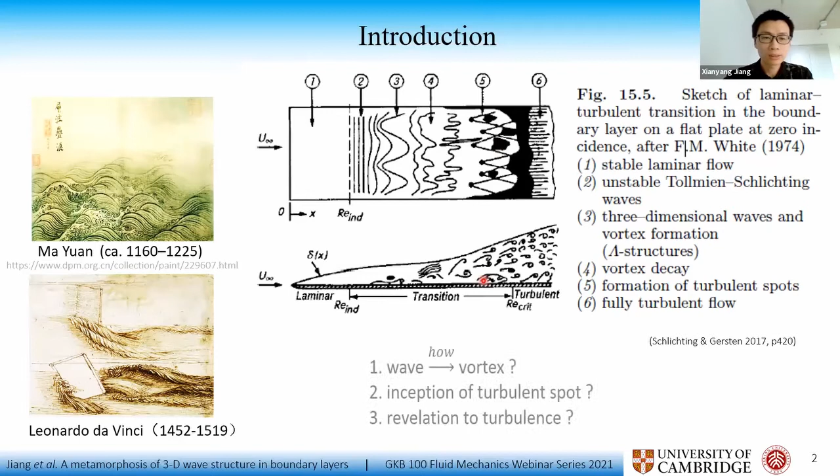The topic today is mainly about transition from a laminar boundary layer to a turbulent boundary layer. Usually in classical transition, it is initiated by environmental disturbance from a 2D TS wave, and it is three-dimensionalized and appears with vortices. In the final stage, there will be some turbulent spots and eventually fully developed turbulence. These stages may not all be in a specific transition path. In some cases there will be only TS waves, and in some cases no turbulent spots appear.

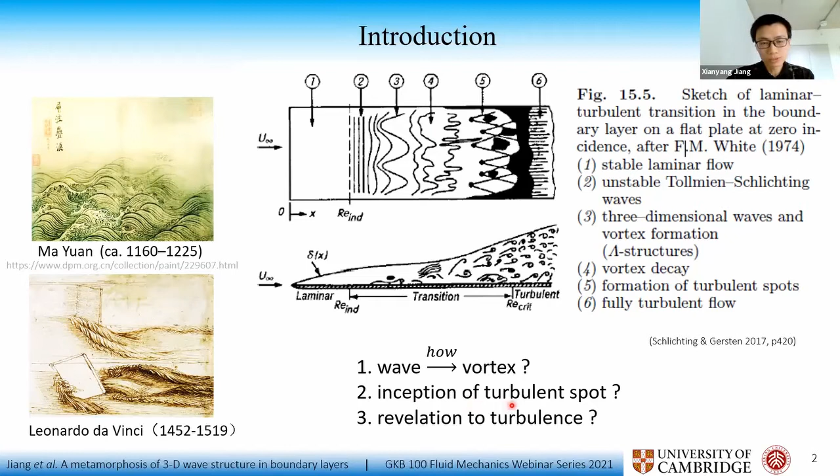So the first question here is how three-dimensional waves develop into vortical structures. The second one is what is the inception of turbulent spots? And how are these two questions related to turbulence? So today my topic is mainly about transition, turbulent spots and the turbulent case, to draw their similarities.

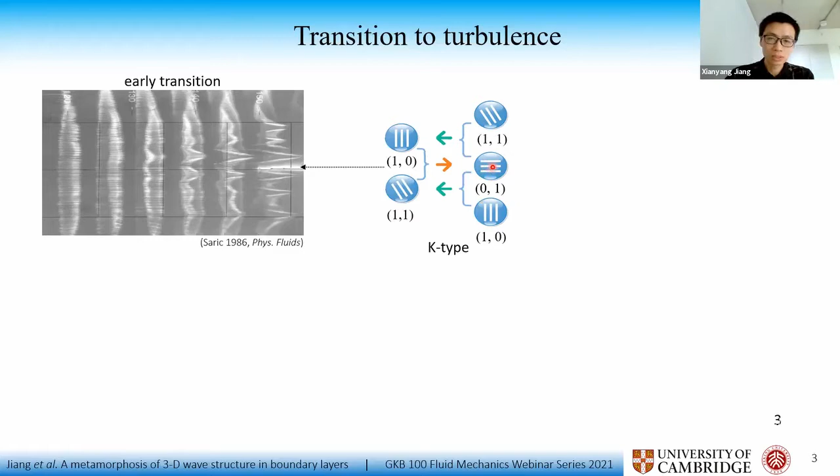Classical K-type transition begins with TS waves and aligned hairpin-like structures. There is some interaction between two-dimensional waves, three-dimensional waves, oblique waves, and streamwise vortices or streaky structures. It was observed that the lambda structures seen in hydrogen bubble visualization develop from a kink structure. This is also termed a soliton-like coherent structure. It's a 3D nonlinear wave packet that can travel a long distance with little loss of energy.

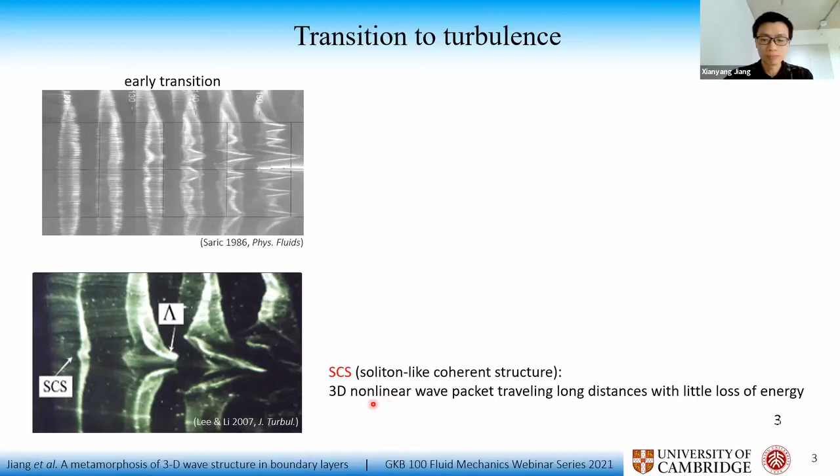When we observe the side view of these timelines, we see the kink develop from the wall, and it becomes a warped wave front. This is a three-dimensional wave front, and finally a discrete vortex. The warped wave front means that the TS wave warps its front, finally becoming a swept-back front, like this bubble accumulation pattern.

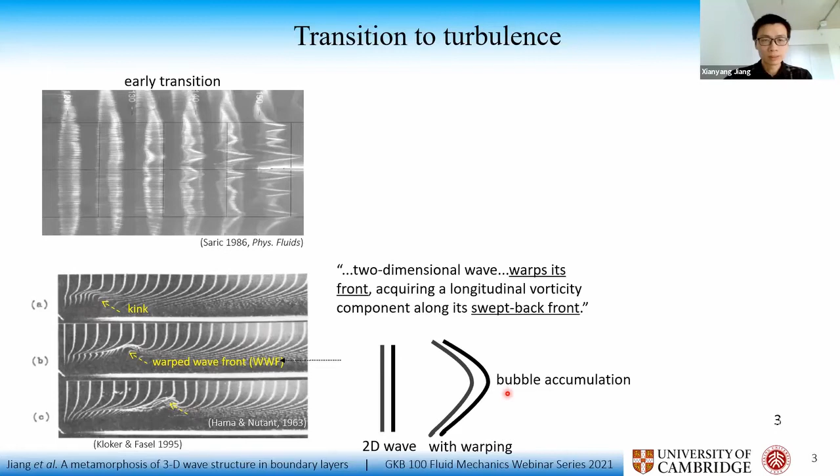The turbulent spot case usually appears with high free stream disturbance. Here is the temperature field in which turbulent spots develop. When we look at the origin of these turbulent spots, they seem to originate from a triangular shaped structure and the hairpin-like structure. So what's the relationship between these triangular shaped structures and the final turbulent spot?

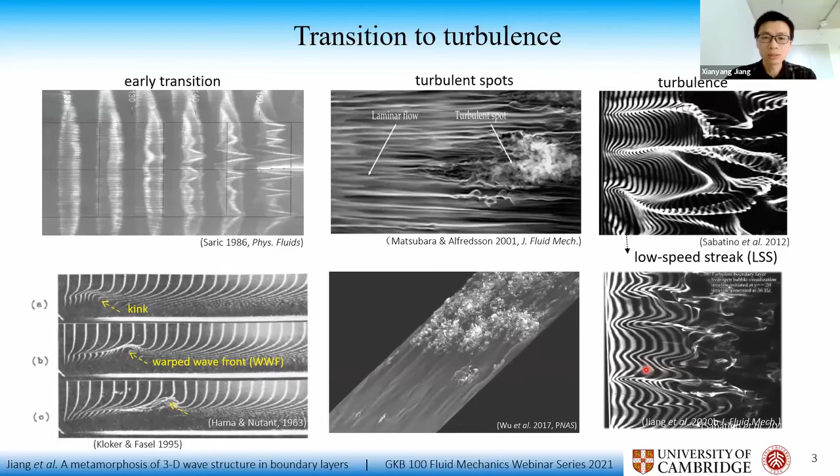In the final turbulence case, in the visualization we see a typical low-speed streak. It's meandering and also oscillating during the development. This low-speed streak is also observed in some transitional cases. So what's the relationship? To answer these questions, we need to visualize the structures.

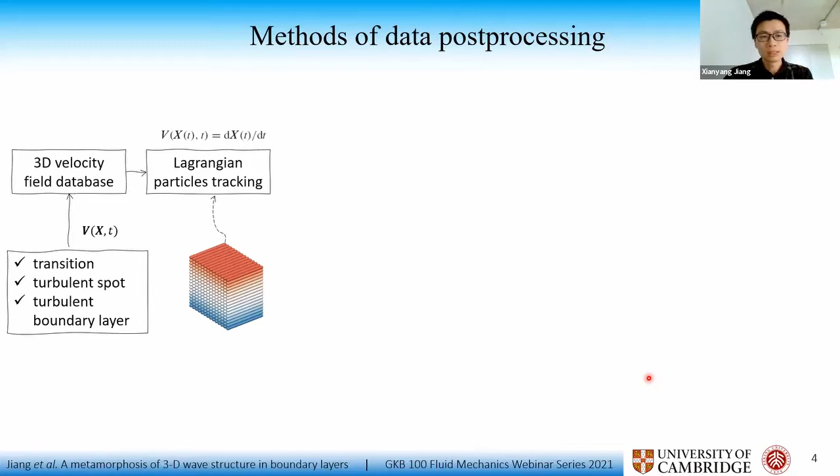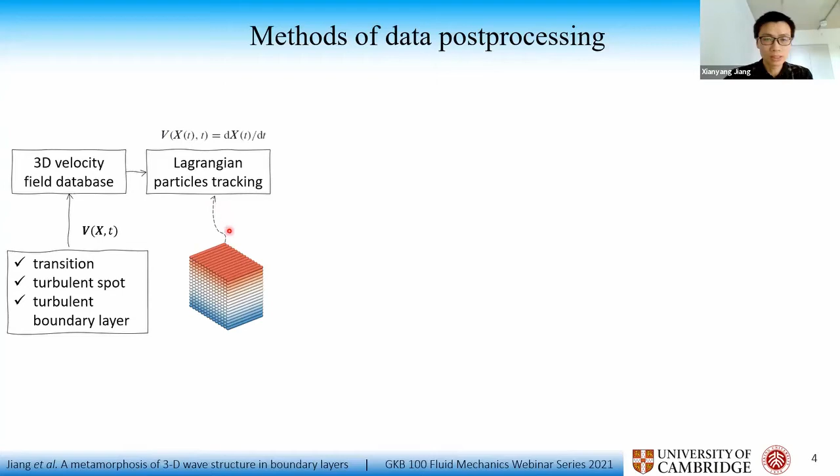In this talk, I mainly use the Lagrangian tracking method. We use data sets from transition cases, experimental or numerical simulation. We track each particle to visualize the development, like traditional streaklines or timelines, and also surface evolution. Then, based on the trajectory of each particle, we extract the Lagrangian-averaged enstrophy. This is an integral of enstrophy over a period of time to see the vorticity concentration or stretching, the shear layer.

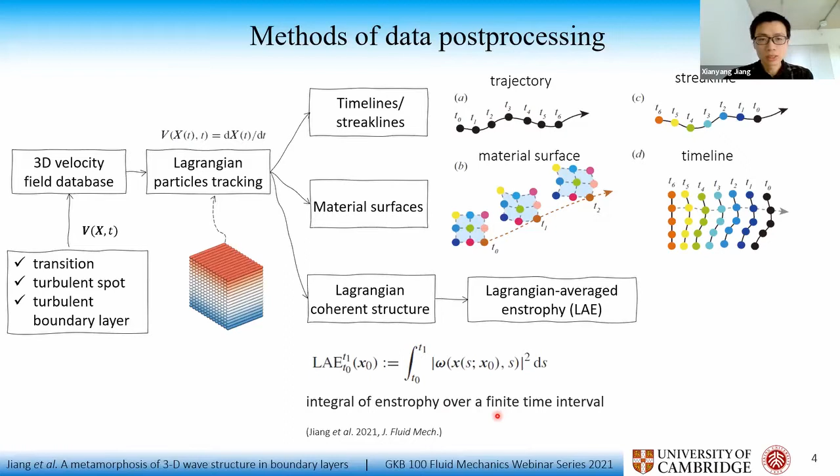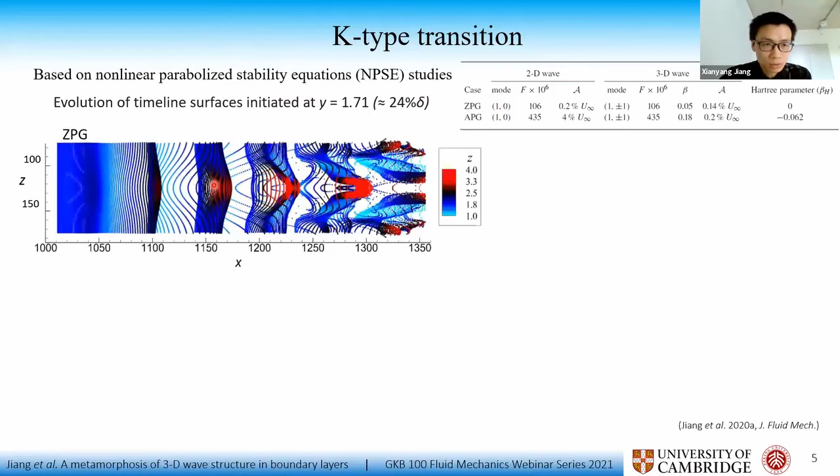For K-type transition, here we show nonlinear parabolized stability equation studies. We introduce a 2D wave and a 3D wave at the beginning to see the difference between K-type transition in zero pressure gradient and adverse pressure gradient. This is for zero pressure gradient. We see the TS wave three-dimensionalize and develop hairpin-like structures. The lambda structures seem to develop directly from the warped wavefront we mentioned before, and the high shear layer is located here in the front region.

But for adverse pressure gradient, it seems a bit different. The hairpin or lambda structures seem to develop from a tilted transverse vortex tube, and finally look like omega-shaped structures. But the whole process, I mean the pattern of this development, is similar. Both cases are similar to our experimental observation of the warped wavefront and lambda-shaped structures. And the low speed region we see here also appears in the middle of these lambda structures.

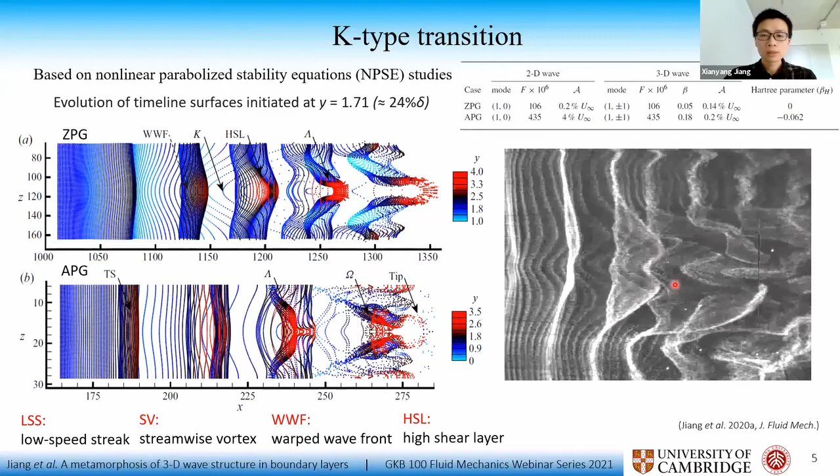Okay, to better visualize the wave development, we also examine the surface evolution at different wall-normal positions for the two cases. And this is the evolution of the surface in the near-wall region for zero pressure gradient. We can also see the hairpin or lambda-shaped structures develop from the three-dimensionalized wavefront.

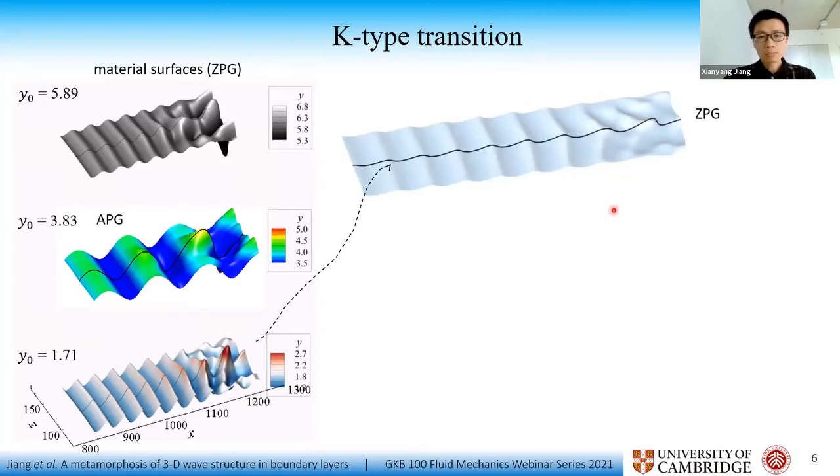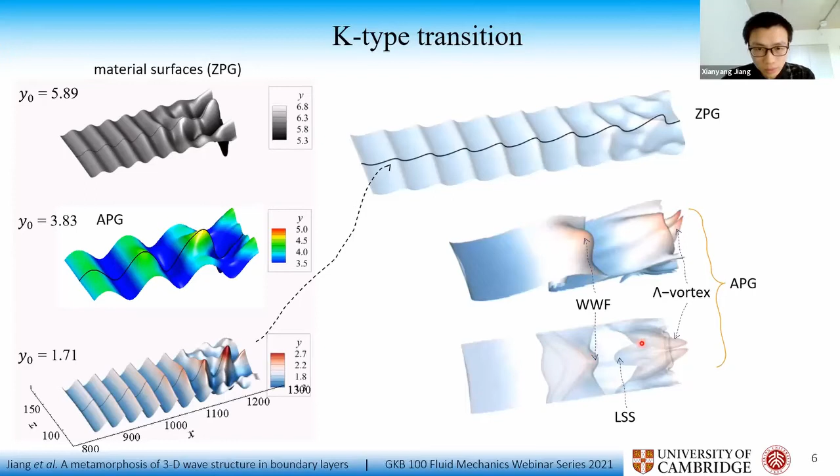But for adverse pressure gradient, we see here the surface deformation, and the lower one is the transparent surface in a different angle to visualize the structure inside this wavefront. And you see that the lambda structures develop upward to protrude the surface. So it means here the structures seem to be closer to the wall.

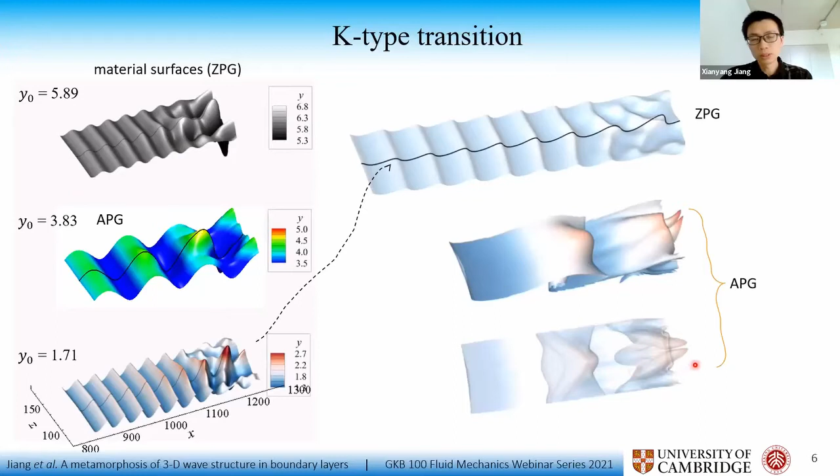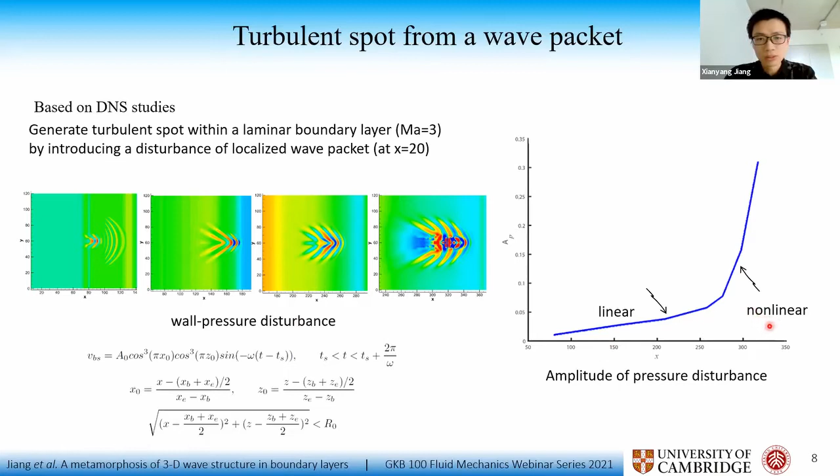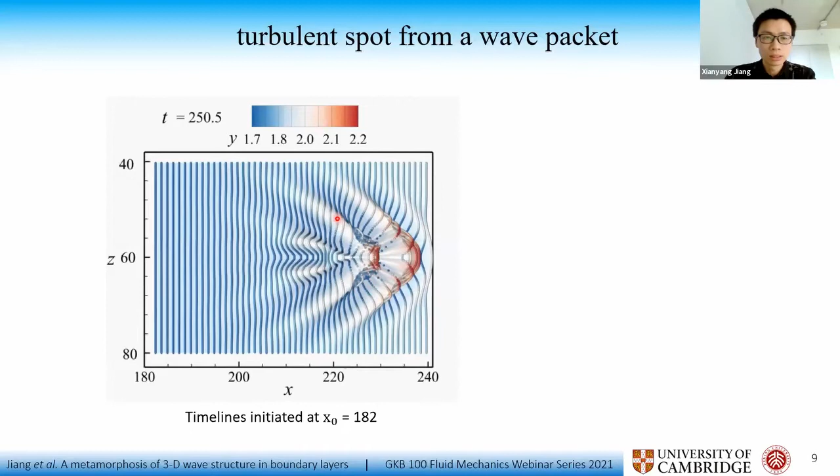And the pressure will undergo two stages. One is the linear stage, and then the nonlinear stage. In the linear stage, we see here there are two wave trains, and they develop downstream with the roll-up occurring here at the wavefront, and two weak low-speed regions appear here.

But for the nonlinear case, this low-speed streak is more narrow and similar to the turbulent case. And in the front of this packet, we see rotational structures here, lambda structures. It means that the low-speed streak may not be the result of vortical structures; it can also be the result of wave packets. And this packet will finally break down into a turbulent spot.

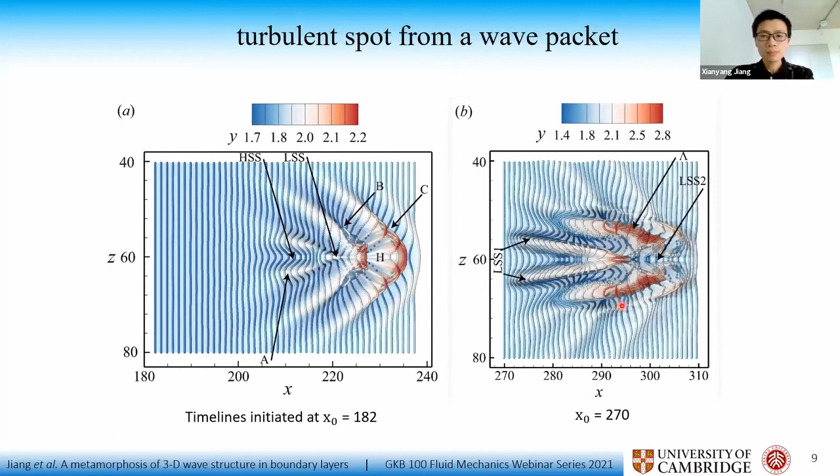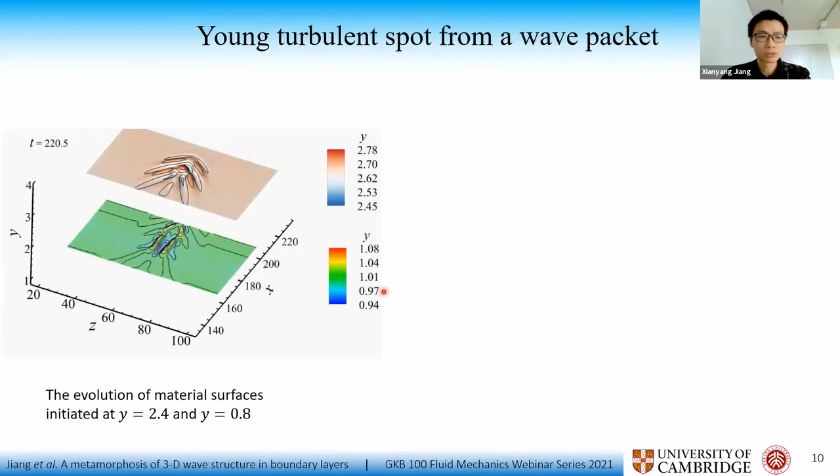The evolution of the material surface near the turbulent spot at different wall-normal distances is shown here. In the higher position, we can see the wavefront and also a very clear three-dimensional wave in the middle. And in the near-wall region, we see two low-speed streaks here, and they consist of several three-dimensional waves.

And the LAE distribution also shows that the strongest concentration of vorticity is in the front region. This means that higher shear appears here. And the contour of this cross section shows that the wavefront has the highest vorticity concentration, and in another region we can see a weak hump-like structure just at the position of this low-speed region. So it seems that the turbulent spot is also a result of wave packets.

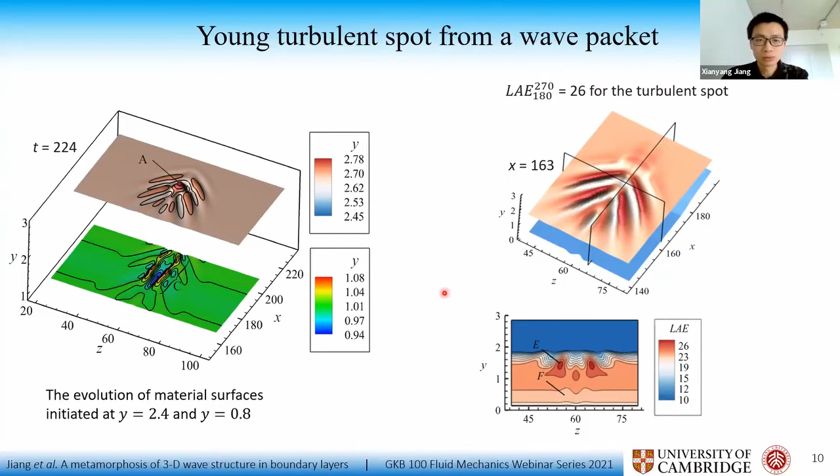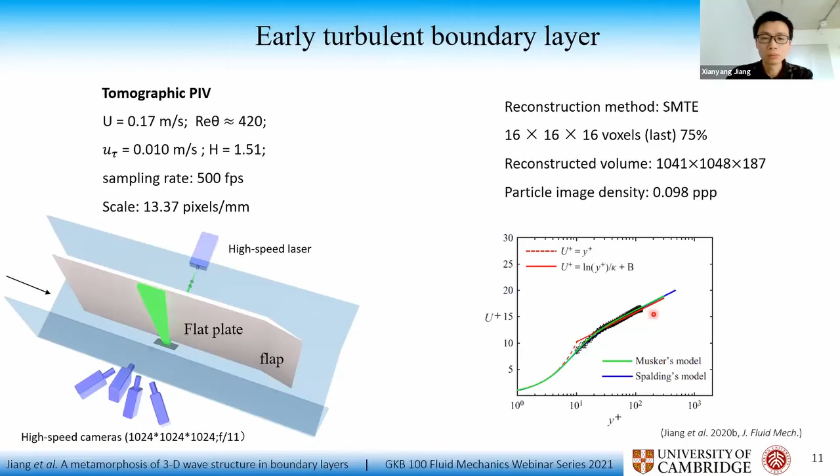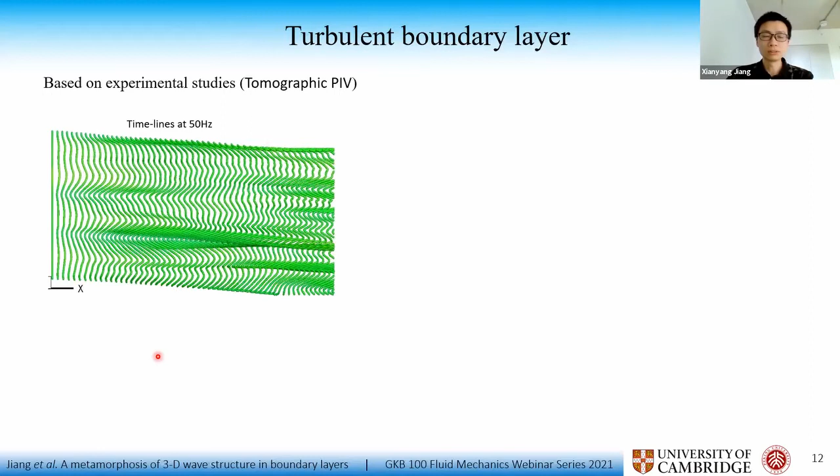So let's see the turbulent boundary layer. This data set is obtained by tomographic PIV, and we focus on the near-wall region where Y plus is below 100. We reconstructed the low-speed streak development here, similar to hydrogen bubble visualization, and identified the low-speed streaks and their development. Here, the low-speed streaks are similar to hydrogen bubble visualization, with spanwise spacing of about Z plus 100.

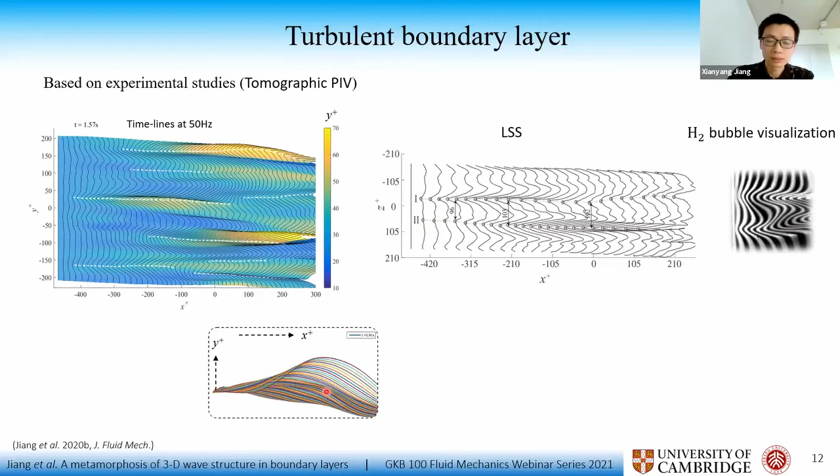And if we place a particle in the region of the low-speed streak, this particle will develop a streak line, just like an oscillating wave development. And the three-dimensional timelines also show the amplification and the damping of the wave structures.

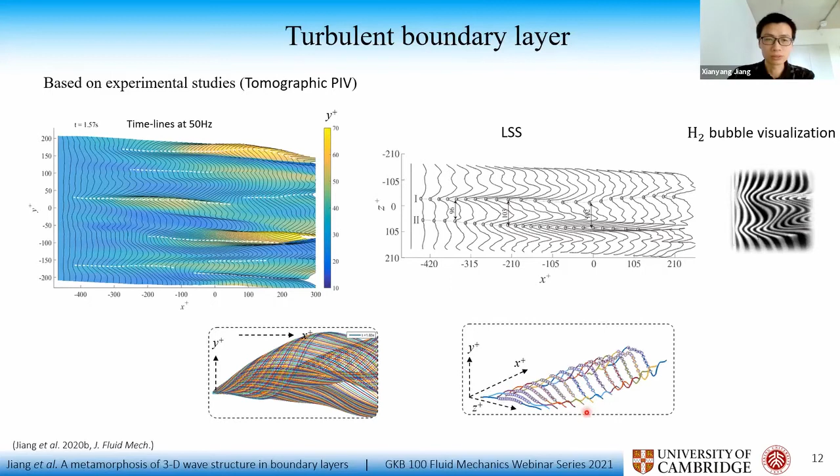So when we trace the surface development in the low-speed region, it also looks like a wave amplification. The surfaces are lifted up at the low-speed region and are swept down, I mean, closer to the wall, at the high-speed region here. And if we extract one surface, we can see it consists of two waves. It seems that the low-speed streak also consists of wave-like structures in this low Reynolds number turbulent boundary layer.

And when we examine the vorticity concentration, we see that this isosurface of LAE shows streamwise vortices, and they are located in the region of high-speed streaks, just at the two sides of the low-speed streaks.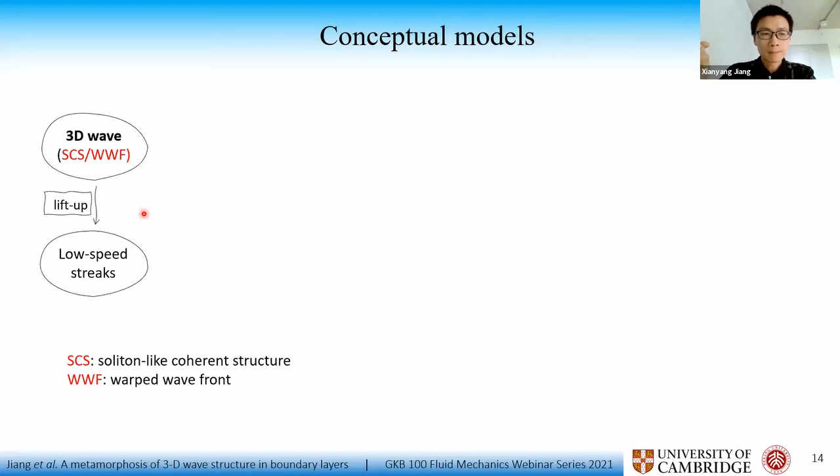When there is a 3D wave, either soliton-like coherent structure or warped wave front, it will lift up to form a low-speed streak. Here, low-speed streak is a general concept, that is, a low-speed region, and the low-speed streak will create vortices because of its instability, like varicose or sinuous instability, to finally induce the streamwise vortex or hairpin vortex. And with the presence of vortex, it also induces low-speed streaks because of a lift-up mechanism. And there will be interaction between these two structures.

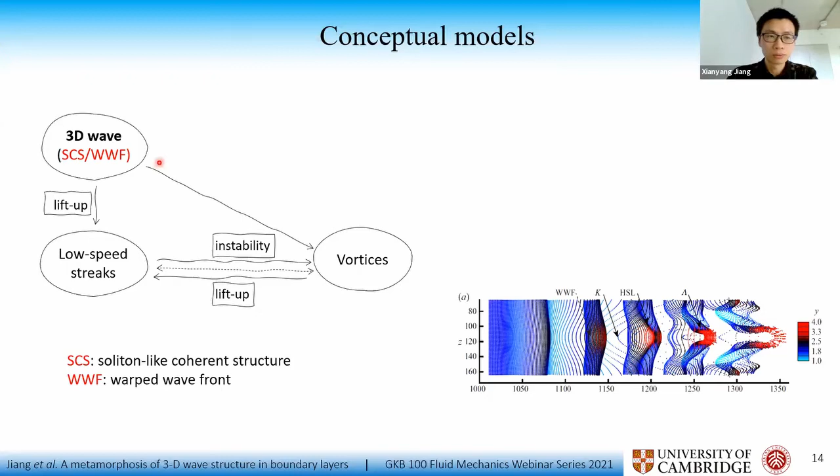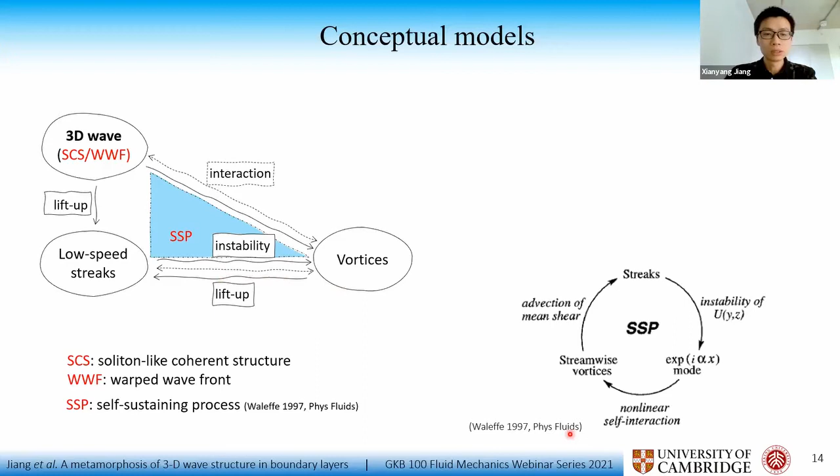Like the work of Zhao, they show that interaction of hairpin structures and low-speed streaks will finally form a turbulent spot. And according to our study in transition, K-type transition, we see the warped wave front is the origin of the lambda structures. So from wave to vortex, and also there is some interaction between wave and vortex according to our mentioned wave resonant interaction. And with these three kinds of structures, they have some interaction and induction. So there will be a self-sustaining process similar to a concept proposed by Waleffe.

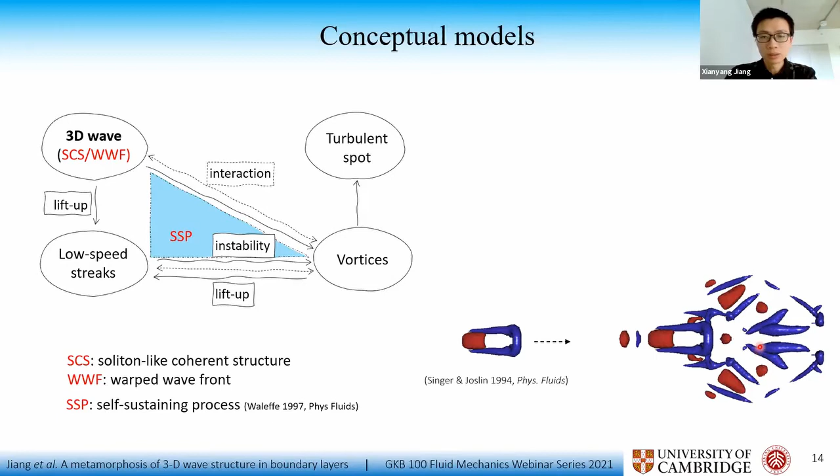And also the vortices will induce turbulent spots because of their lateral and streamwise spreading or regeneration. And there will be interaction between streaks and spots in many studies. And in our work here, we see that 3D wave packets can be broken down to turbulent spots. And with the turbulent spots and the vortices, they will finally lead to turbulence. So this is a conceptual model based on our observation.

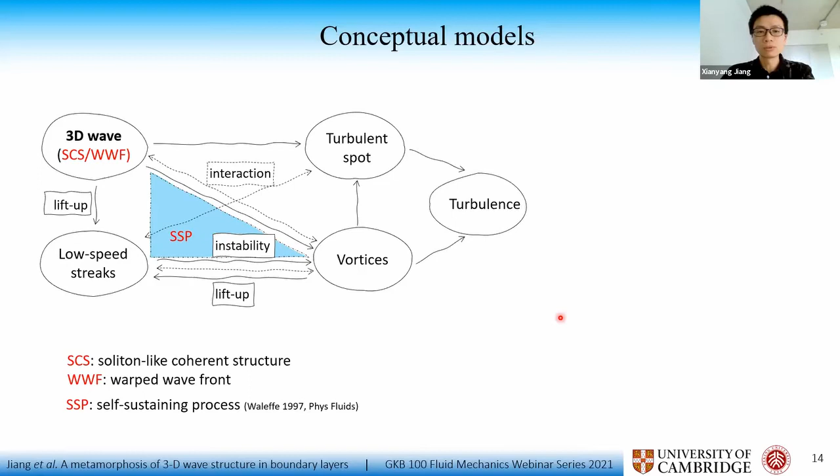So here is a conclusion: we see in the transitional boundary layer that the lambda vortex developed from a 3D warped wavefront. And with the presence of adverse pressure gradient, the warped wavefront or lambda vortex undergoes a more rapid evolution and a stronger stretching near the wall. And also we see the wave packet also contributes to the inception of turbulent spots.

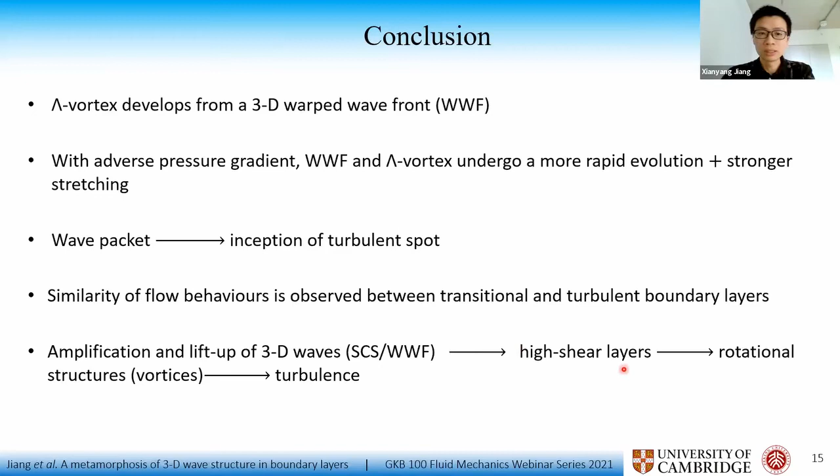And there's a similarity of flow behaviors between these transitional and turbulent boundary layers, mainly by the wave front or wave-like structures. And we propose that the amplification and the lift-up of this 3D wave will create a high shear layer that leads to rotational structures and turbulence.